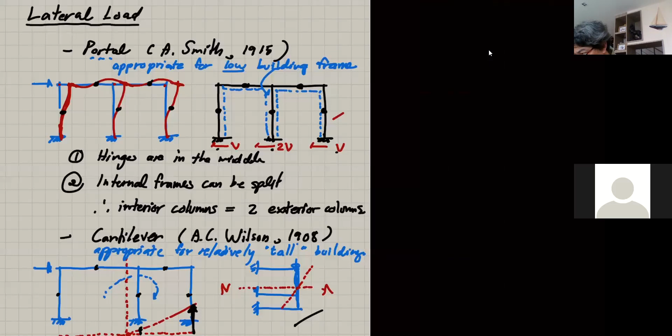The basic. Now what? What's going on here? Okay. Can I? Now I lost my pen. Huh. Funny how, you know. So let's see if I could go back to that. I can connect my... See, I think I just recharged it yesterday. So now it's gone. What do I do? One moment, please. Better stop this record.

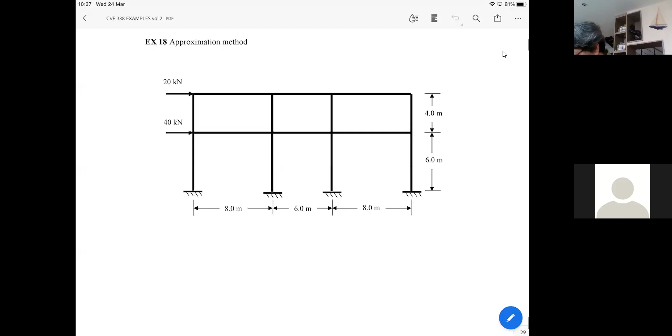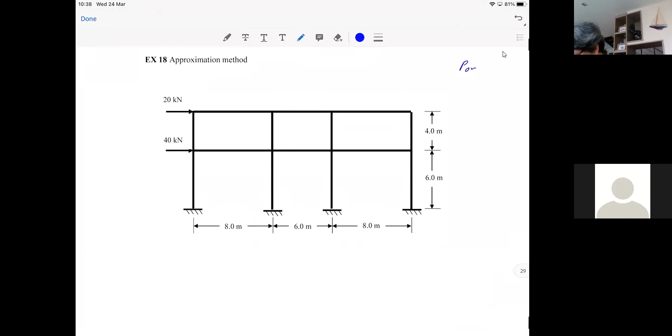Okay. Now this is the frame that we're going to work on, and we're going to try the portal method first. Okay. All right. The portal method. But I should like my pen to be thicker than this. Okay. In portal method, you can count that you now have 1 portal, 2 portal, and then 3 portal.

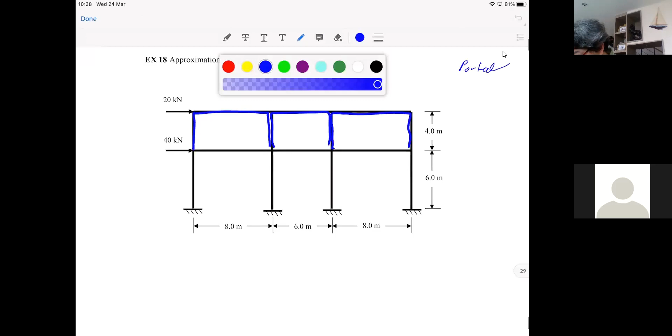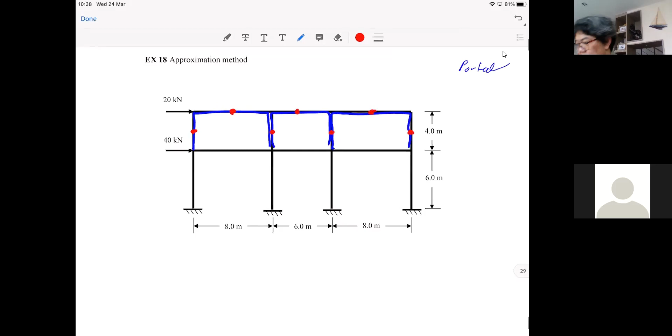Okay. And you can add the hinges in the middle like this. 1, 2, 3, 4, 5, 6, 7, and then of course more. 8, 9, 10, 11, 12, 13, and 14. Now you see you have 3 portals up top, and you also have another 3 portals at the bottom. Okay, so based on this, we can cut the free body diagram here.

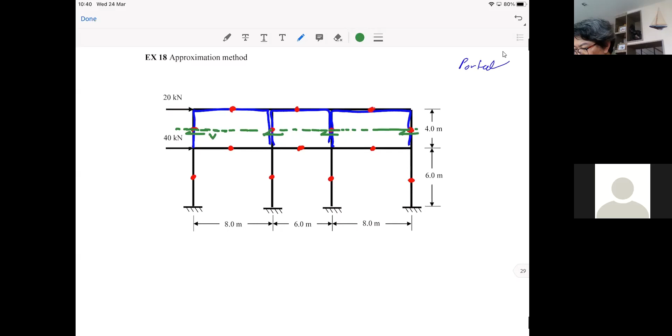Black would not be a good idea because it's just too similar to the frame. So let's just use green. And now, like I demonstrated before the break, you now have 2 exterior columns and 2 interior columns. So that means you have 1 shear here, and then 2V here, 2V here, and then V here. So based on the first free body diagram, you have V, 2V, 2V, and then V. You can say 6V is going to be equal to 20.

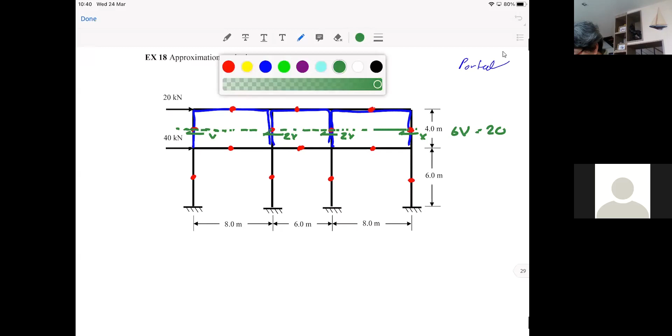Okay? And now, let me try to write down the first free body diagram for you here. Oh, again. That's why this is really not very convenient at all. Okay? So your first free body diagram is this one. It's a little bit short. So cut through the first line of your hinges. So you have 20 here, and that's a V. Because 6V is equal to 20, V is 20 over 6 or 10 over 3. All right. So that means now we already solved the shear.

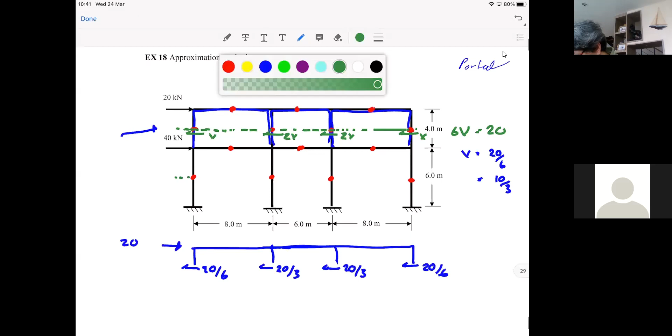That's 20 over 6. That's 2V. So it becomes 20 over 3. That's 20 over 3, and that is 20 over 6. Notice that your sigma Fx should be okay. Okay, and then the second free body diagram, I'm just gonna cut through here. Maybe I change the color to be a better idea. Okay, the second free body diagram, we cut through the hinge on this level.

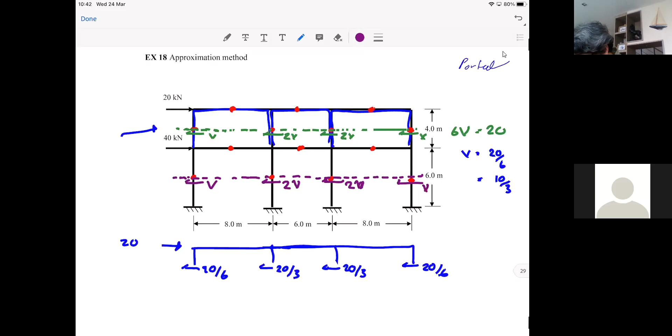Okay, and now from this, again, you will have V, 2V, 2V, and then another V. But this time, your free body diagram is going to be this one. Let's make it longer. Because we cut through the hinges on the first floor, so to speak. So this is going to be your free body diagram. So that means your external force is 20 plus 40. And this time you have 6V equal to 60. So 1V is 10. So that means this is 10. This is 20. This is 20. And then this is 10. See how easy that is?

So by using the portal method, we assume that each column will take the equal shear, and the internal column can be broken into the equivalent of two exterior columns. So we can use that to easily solve the shear. And now we can go about step by step and start making our analysis on each member once we know the shear. So I'm gonna swap to my

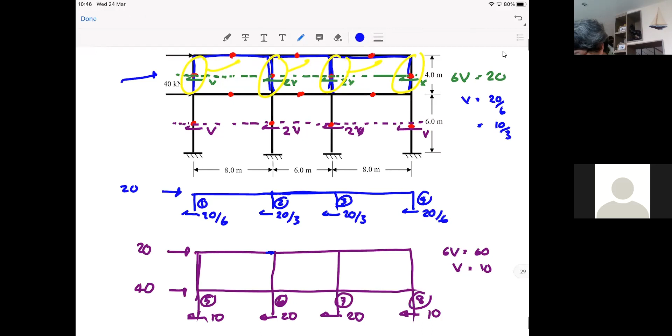6, 7, and 8, okay. And let's try to call our beams by letters, will that work? So that would be... here we go again. This would be beam A, or let's be more professional. Let's call this - what do you prefer, A, B, C, or B1, B2, B3?

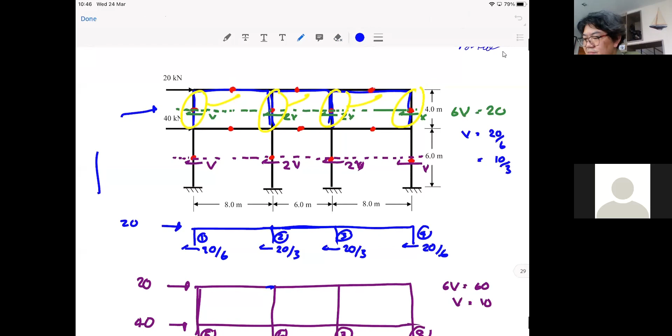No feedback as usual, so okay, this is structure analysis. So let's say this is A, B, C, D, E, F. That's the names for the beams, okay? So we have column number 1, 2, 3, 4 on this floor. 1, 2, 3, and 4, and then 5, 6, 7, 8, and then beam A, B, C, D, E, F, okay? So I'm gonna work with column 1, 2, 3, 4 first. Remember that we already know the shear, okay?

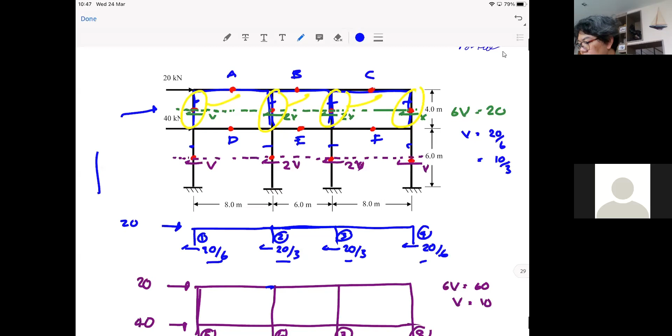So let's come here and start working with our free body diagram, okay? So let's say we are looking at column A, okay? So the free body diagram that I have now would look like this. Okay, I have the shear going on here equal to 20/6 or 10/3, right? And therefore, to balance my sigma fx...

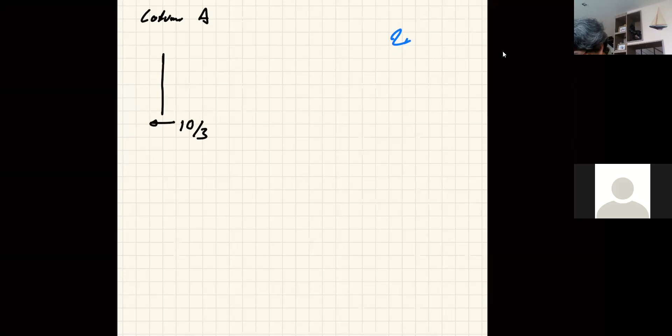Let's say the black one is something that I already know. So this, to maintain the sigma fx equal to 0, I have to have this equal to 10/3. You guys follow?

And now because we assume that our hinge is here in the middle, I can take moment at the internal hinge, and I can obtain my moment now.

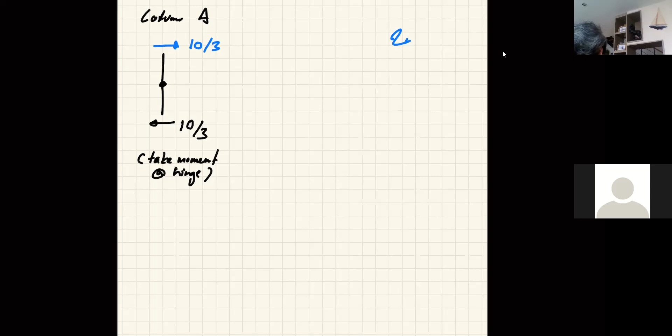Okay, so my moment is going - you know what, I'm gonna use the color red. My moment is going to be equal to 10/3 multiplied by half the length of the column. Okay, and because our column, I believe it's 4 meters long, so this half length is 2 meters.

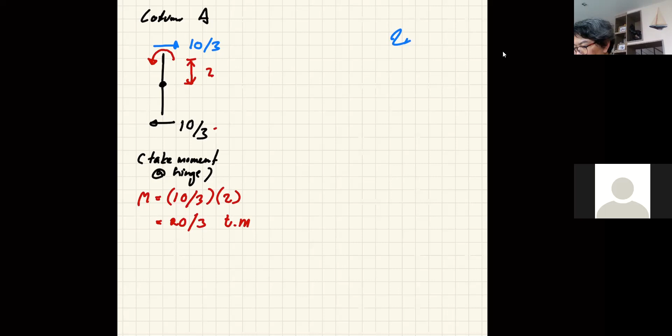So I can say that my moment is equal to 20/3 ton meter, and you know this blue shear is going to the right, so my moment here should go counterclockwise, and the black shear underneath here goes to the left, so I should have another counterclockwise moment here, and that is 20/3, and that is also 20/3. Okay, so we now have a column under equilibrium, but this is not finished yet because you don't have the axial force.

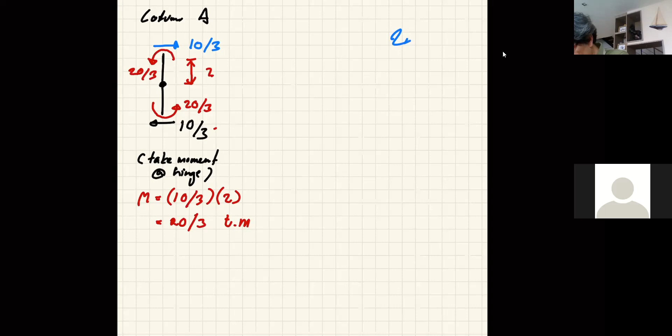Okay, you can repeat this with column B, okay. Column B is going to be the same. You have a hinge in the middle. Now you know that shear here is 20/3. Okay, so you know again that this is going to be 20/3, and let me try to make it look more like a 3. 20/3.

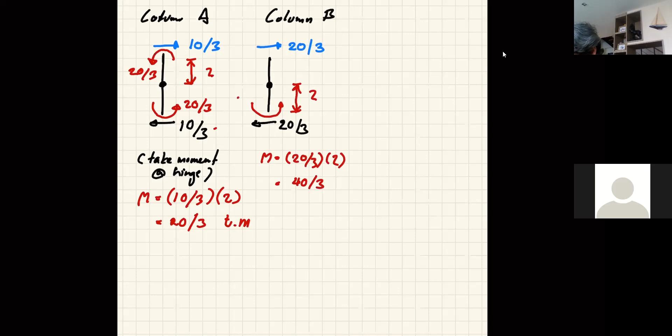So likewise, I can calculate the moment here. Now it's going to be 20/3 multiplied by 2, which is half the distance again. Okay. So here is 20. That's going to be equal to 40 over 3. 40 over 3. And this is another 40 over 3. Okay, so that's column B to you. If you fail to follow me, please do let me know, okay?

And you can guess now that column C - it's going to be similar to column B. That is because it has the same shear. So in response to that shear, we have the same shear up top. And as a result, we have the moment of 40 over 3 and 40 over 3 here. Don't forget the unit, ton meter.

And last one is column D. That is similar, okay? Column D, which begins with 10 over 3. And so in response to that, you have 10 over 3 here and the moment of 20 over 3 and 20 over 3. Okay, so is there any question?

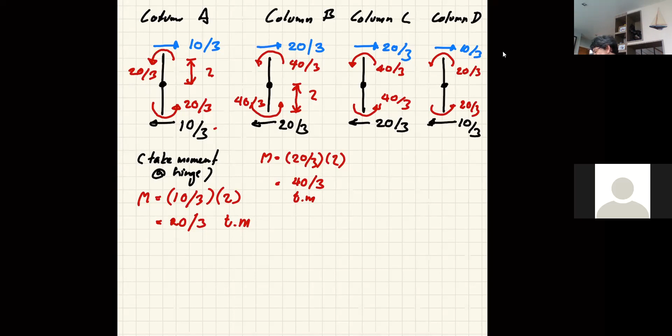Teacher, sorry - so the moment, we consider with 10 over 3 blue color or red color or black color? Well, both. I use the black color to indicate that you got this shear value from this. All right, so you got this shear value from here.

Okay, from using the portal concept to sort of average the shear value out on every column. So that's how you got a rather average value. And then you put the shear 10 over 3 here. So as a result, you need to have the blue shear on top so that your sigma fx is equal to 0, right? Yes. So then you use both shears and you cut the free body diagram at the hinge here.

So basically, if I am going to draw the free body diagram, I can draw the free body diagram of this piece, right? So then that becomes this, and then the hinge, and then you have 10 over 3. So you can calculate the moment by taking the moment here, right? By doing that, you get this moment, which is equal to 10 over 3 multiplied by the moment arm. That is 2 meters.

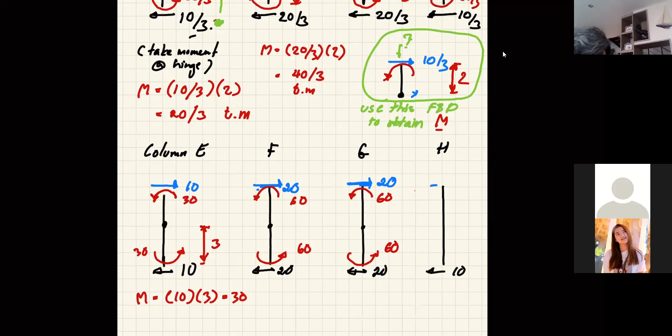So that is 10, and again, this is 30, and then that is 30. So, okay, at least everybody should be able to do this.

Okay? Now we move on to the beams. Okay? So now let's remember this. If you look at column A now, you know that you have this moment 20/3 here. Do you see that?

20/3, this one. This one will have to go on to the beam that is connected to the column, right? Please notice that you now have 20/3 counterclockwise. So that one must go to the beam with the clockwise fashion. Correct? Now, again,

it can get confusing. So if you are confused, the best way is just to try to draw the free body diagram of the joint. Okay. Now the problem is trying to call the members with names like column A, B, C, D and beam 1, 2, 3 - we don't have a name for the joint.

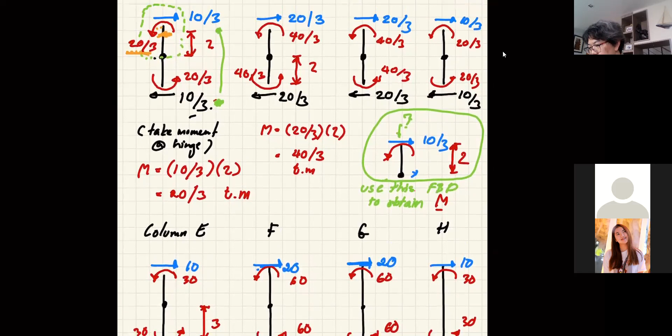So from that, let's try to stay on this same page. I don't know if you can see this. Okay, let's try to put the size down a little bit. And now I'm going to draw the free body diagram of this joint, coming in from column A at the top. So now you can see that you have the

counterclockwise moment. So from that, you have this clockwise moment, right? It has to be equal and opposite to that. Now again, I use the black color because it comes from column A. And now you see the blue shear is going to the right, 10/3. So that means when it comes to this joint, this shear is going to the left.

And the value is 10/3. Okay, so these two we got from column A, but remember that we still have the external load at the joint, 20. So I'm going to use a totally different color so that you realize that this is

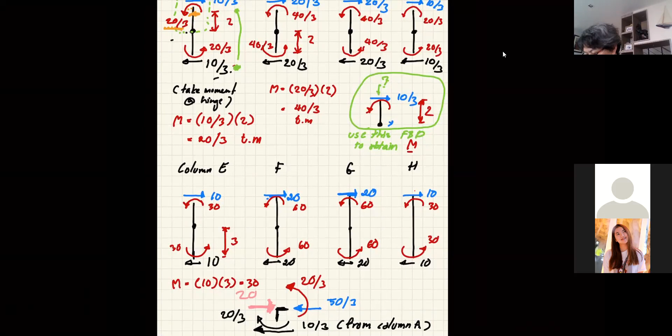We can do the axial force later, but keep in mind that from this, you now have 20/3 moment going counterclockwise, right? So that means the moment on the beam should be clockwise, 20/3, right?

Okay, and now remember we have this, so you can use this free body diagram. Now I can say sigma moment is equal to 0 again, but this time you have the moment 20/3. This better be equal to the shear multiplied by half the length, correct?

Let me try to do it better. And half the length is how much? 4 meters. This distance is 4 meters. Okay, so that means your shear is now 20/12, right? Or 5/3, or 10/6, or 5/3.

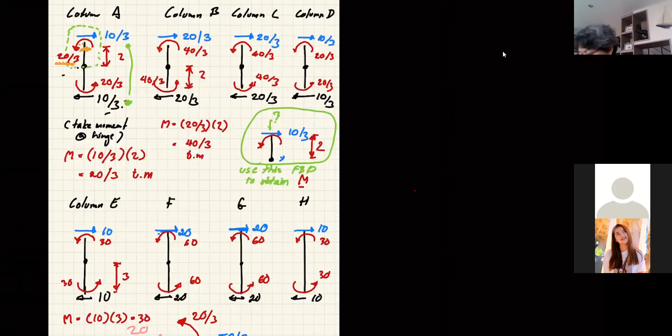So I calculate the blue one. And the red one, I can just use, actually it's calculation, but using sigma Fy equal to 0, so it's more straightforward. And now you know, you can see that the shear is equal, so the moment better be the same number as well.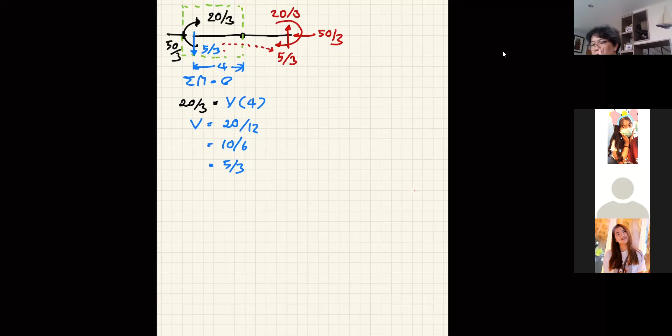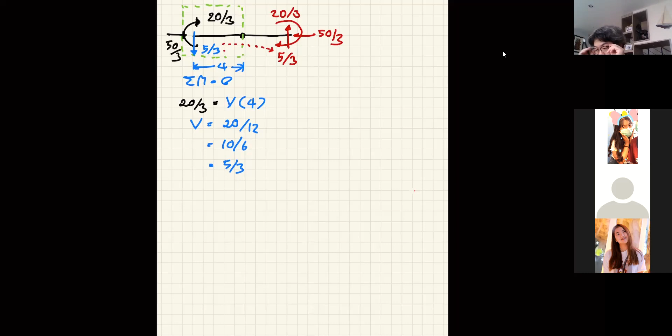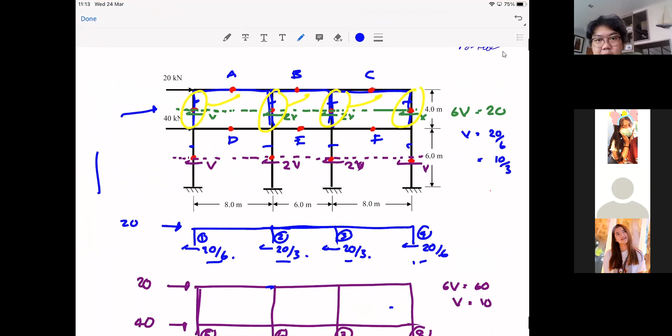But this, you shall need a little help from the free body diagram of a joint, because next beam, if I go back here, it's beam B, okay? You know beam B, it connects with this joint where there will be beam A on the left, column number 2 underneath, and then beam B itself. So before you know how much moment is on beam B, you need to take the moment from beam A, which is this one. You need to take moment from beam A. I forgot to

down somewhere, so let's say beam A. It's beam A or beam 1? Don't remember. Oh, it's beam 1, right? Beam 1. And then you have this column B. So you have the moment there, okay?

So let's get that. Let's say I'm going to draw the joint here. So you have the moment of 20/3 that's going clockwise. So this better be 20/3 counterclockwise from beam B1. Okay, now we go back and look at that.

We have counterclockwise 40/3 from beam column B. Okay, so we should have clockwise moment of 40/3. This is from column B. Okay, so ladies and gentlemen, that means we now can calculate that you need

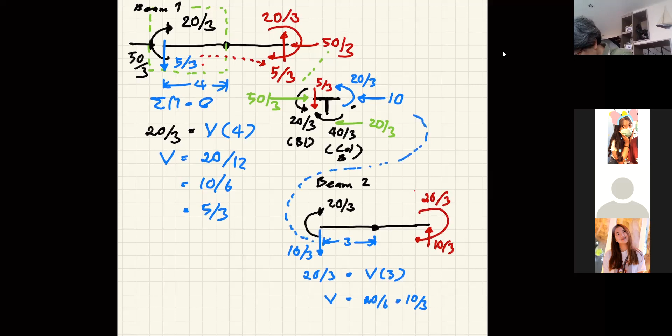And so once you got this calculation, now you would know the axial force on the column, okay? Because this is that. Excuse me, it's 20 over 9, isn't it? Yeah, 20 over 9, you're right. Sorry, yeah, right. Thank you. I thought it didn't look right.

So you do this a lot on the exam, right? But I'm doing it as well. 20 over 9, so scrap that. Okay, thanks. 20 over 9. So you can bring that back to that, and now you have 5 over 3 and 20 over 9. You now can calculate the axial force on the column.

Okay, so let us try to finish the beam. So we have another beam left, and yes, I think we are going to have to do another joint. But this is going to be pretty similar, okay? Right. The black one, this is 20/3 clockwise, so it better be counterclockwise here. 20/3, and the column is pretty much the same, so that will be another 40/3.

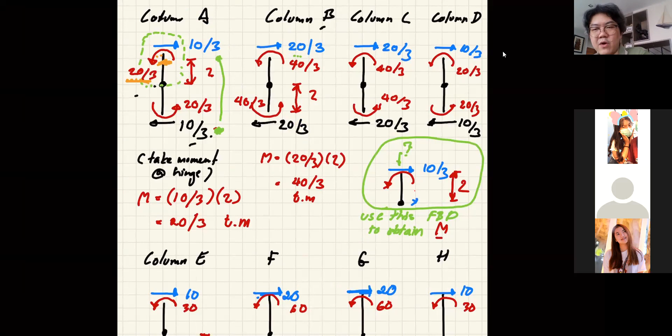You see, but axial force is not difficult. You can do it later. The key is that you know what to start. You start off on the columns, knowing the shear, calculate the moment, then transfer the moment from the columns to the beams, then calculate the shear on the beams. And then eventually the shear that you have on the beam will become the forces on the column as well.

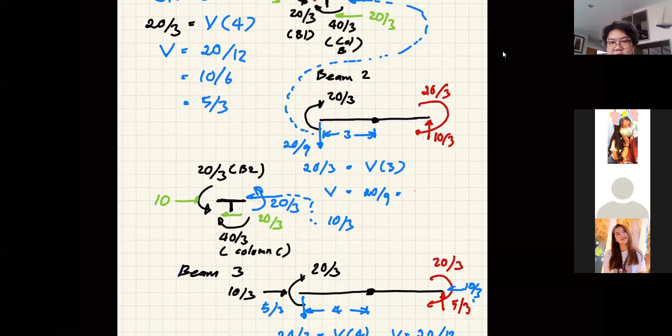Okay, so why don't we take a break now, and we'll come back and try to finish this problem. And remember that there will be the cantilever method to contend with as well, so we may not finish the cantilever method today, but that should be okay. All right, so let's stop the record.